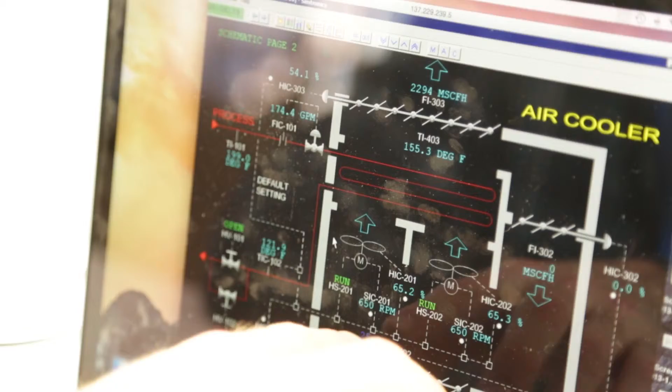This is an air cooler unit. It's essentially a fin-fan unit, and we're going to be taking a process in, cooling it through our fin-fan unit, and running it out at the set temperature that we want. In this fin-fan unit, we have our two fans blowing air from the bottom to the top to cool the incoming process, which runs through these red lines and comes out at a colder temperature of 120 degrees when it's coming in at 200.

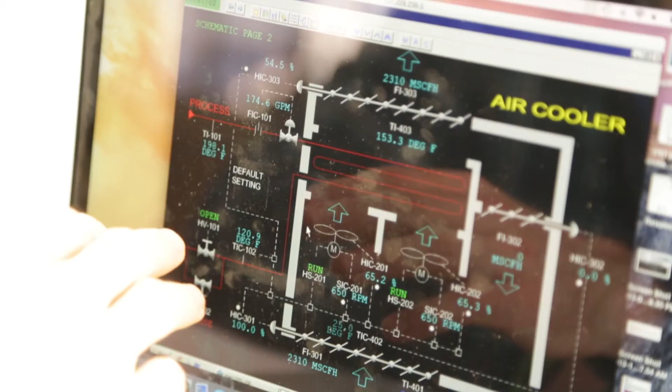So we could do anything from condensing steam to cooling oil that's coming out and been compressed from a higher pressure. When it gets compressed, it becomes hotter, so sometimes you have to run it through coolers, cool it down. And after about a minute, something will start to go wrong, and I will have to correct it.

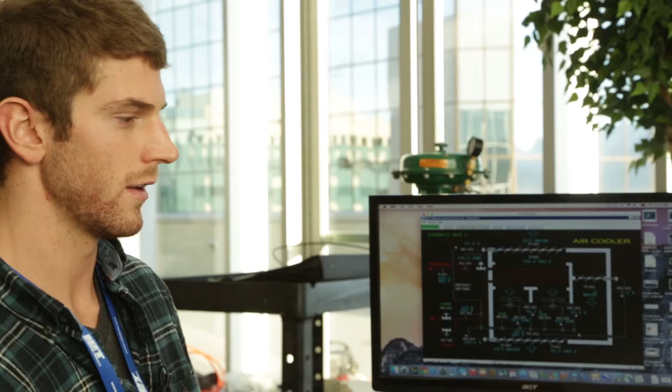Okay, and it's starting. I don't know if you can see, but our air temperature was initially 68 degrees, and it's starting to kind of drastically drop. We're already down to almost 60 degrees. So as you can see, our cooling tower, that will cause cooler air to run through it, which will be lowering our desired temperature from 120 probably down to, who knows, anywhere in the 90s range to much cooler.

There's a few options I can do. I can close louvers and just keep the fans turning, or with this extra cooling that we now have and everything completely open, I can maximize efficiency and decide to increase my flow rate. I click on this valve, which controls our flow, and through this I can turn our set point, which is at 130 gallons a minute, and type that in as, let's try 150 here as we're increasing.

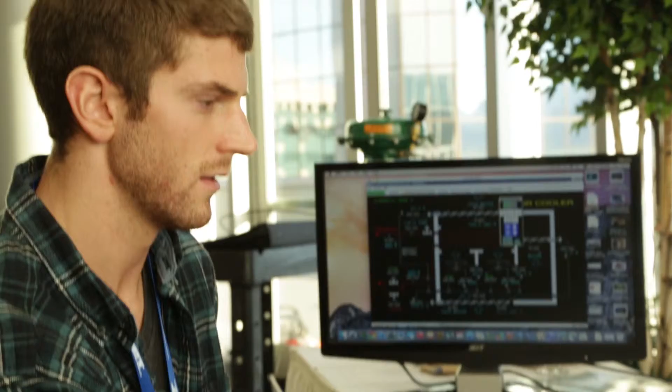It's running fine and the process is doing good, and I just have to wait a second until it decides it's going to start changing something on me. Okay, now my set point is at 150. We're still below 120, so I'm going to increase my flow so that more process is flowing through faster and not cooling as fast, and will still come out at our desired temperature.

Okay, so now I've changed my set point to 175 gallons per minute to help increase flow, or decrease residence time, so it's not cooling as much now that we have colder temperature. And as you can see here, my temperature is about 120, 121, back to where it was.

The temperature has now dropped to 25 degrees and we're holding steady about right there. So it seems to be holding pretty steady. I'm just going to make minor adjustments from there. We're about where we're needing.

So I've essentially corrected the problem, and now our process is flowing at the right temperature, going out to wherever it is. And in a way, I've also increased productivity by having more process and flow coming through, so more can be reheated or used in whatever it's going to be next down the line.